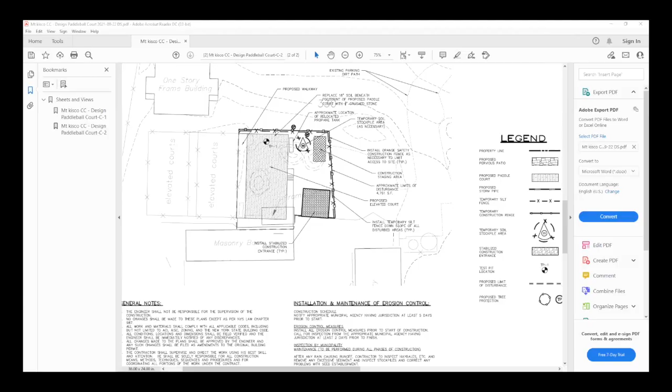So you can see just quickly from Mike's plan here, to the left you can see that there are 2 elevated paddle tennis courts as identified. And we're installing a 3rd one to the right of those. That space currently where that court is shown is blacktop, paved. It's part of the area that the maintenance facilities use to park equipment and store material, etc. So we'll be removing that in favor of the court.

And to the right of that, there's a shed that they use now that will be removed. And there's a landscape buffer on the right side of this court that will help visually separate the courts from the area where the maintenance facilities operate.

John, I'm here now if you want me to share. It's up to you. Okay, Mike's got his plan up here, so that's fine, Karl, thanks. Okay.

So we can see this plan here. There are other drawings of this, and obviously this does not involve any kind of building structures or additional buildings.

The court is added, it does not require, it's not about increasing membership to the club. Frankly, although I'm a member of the club a long time and serve as their architect, I don't play paddle tennis myself, but I understand from the membership that the desire to add this is in great demand.

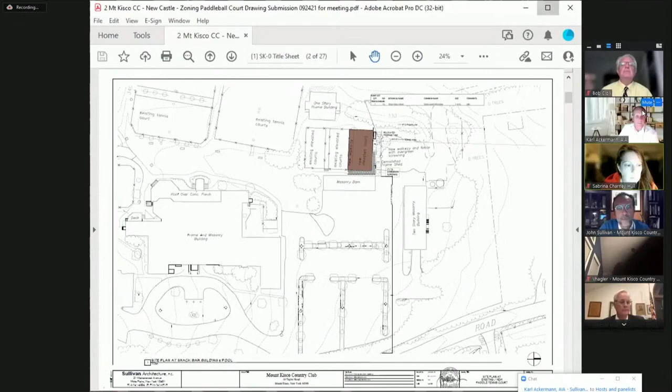You can see here that by this distance diagram, this red rectangle is the added court, and the 2 are existing. There is a large stand of trees that runs behind here. So from across the course, you should not be able to see these courts, maybe just a very faint glow of light. I'm going to go to the next screen.

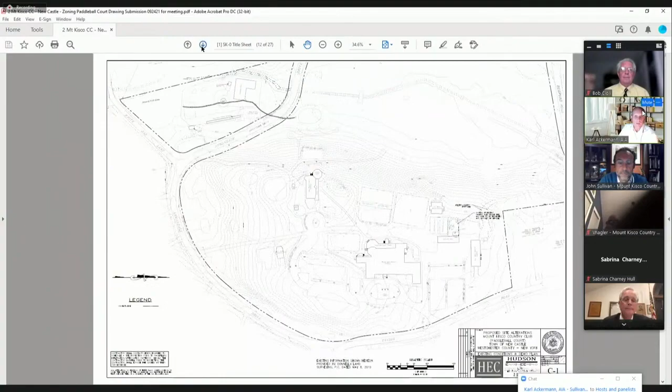And I can go back to a site plan for the board. That's basically a summary of the visuals. If you'd like, I can put up a bird's eye view if that would help. Sure.

How often are the courts played on currently at night? I believe it's become a pretty active sport, as I said earlier. And again, it's predominantly played at night and in the winter, when the rest of the club is, for the most part, shut down.

Could you explain, is the lighting on the court directed down? Yes, the fixtures do face down. We have submitted lighting calculations and fixture cuts, but they are directed straight down.

And they're not that tall, right, Karl? How high are they above? They're about 15 feet from grade. Right.

And there's two courts that are currently there with very similar lighting. It's all down lighting with shrouds on them.

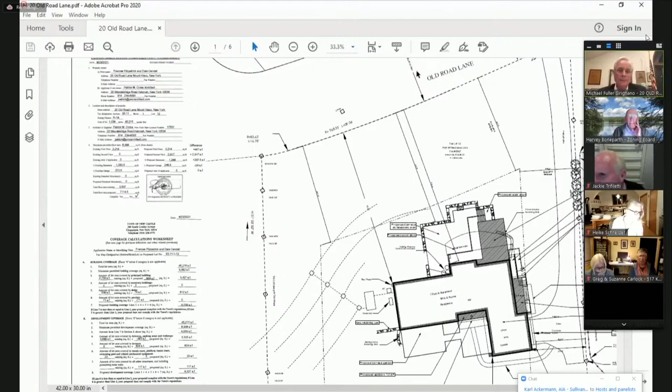So Jackie, I think you have a bunch of photographs. I'll go through them very quickly just so the board can see how well screened this house is from neighbors. If you could put those up quickly, we'll run right through them. These photos will show that neither our minor side yard setback variance nor our FAR variance will produce any undesirable change in the character of the neighborhood or cause any detriment to nearby properties.

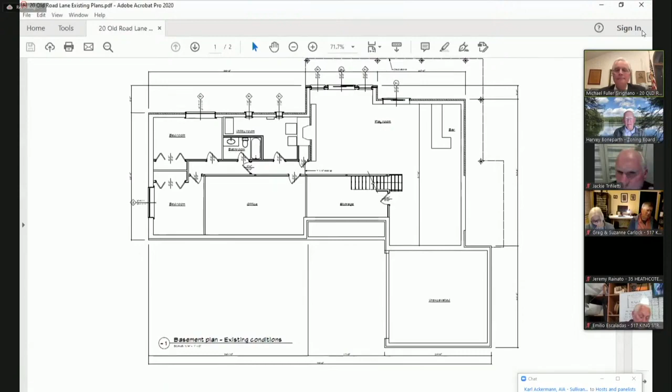Go next. Scroll down to the next plan. All right, this is the existing first floor plan.

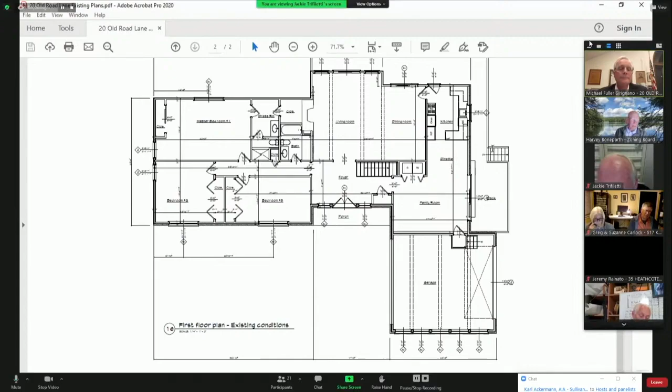First floor has a small kitchen in the upper right corner. There's a dining and entry space below that, between the kitchen and the garage. To the left of that, next to the stair, is the main entrance to the house, which Michael pointed out is on the 128 side rather than the Old Road Lane side.

At the left end of the house there are actually 3 bedrooms, some closets, some dressing areas. The plan of the existing actually works out to 5 bedrooms. What we found from the health department is that the approved septic system is for 4 bedrooms, so we are reverting to a 4-bedroom house for the new, not expanding it to 5 bedrooms, which is what the current arrangement allows in the existing house.

Can you go to the new plans. Are the new bedrooms intended for grandchildren or others?

Well, Dale and Francis have 3 adult children. Well, one's in college - I suppose that still makes her an adult. They hope that certainly there'll be space for grandchildren to visit, but they're going to hang on to the house next door at number 14 with the hopes that one of their children may want to live near their parents, as strange as that may sound.

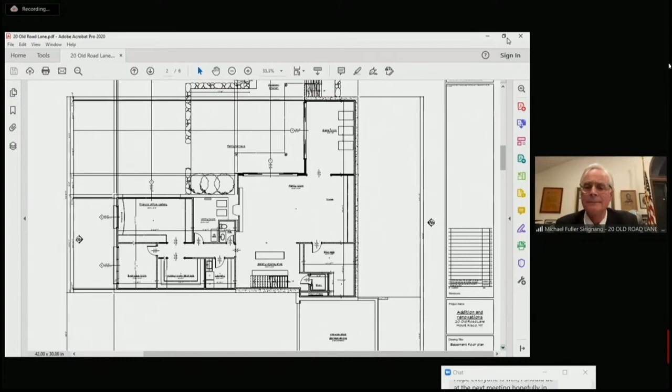Can you show us the plan that has the second floor addition? Yes, I'd just like to point out on the site plan here, Michael touched on it quickly - there are 3 areas of addition to the house. The area at the top of the page is an addition with a footprint of 422 square feet that will house a kitchen on the first floor and a bedroom on the second floor.

The small rectangular hatched area to the right side is a second floor addition that overhangs the new entrance at the first floor, so it provides cover to the front door. And then the small hatched area at the bottom, where the existing entrance is, that is currently a roofed area - it will be incorporated into the first floor, so only about 70 square feet is being removed, changed from roofed exterior space to interior space.

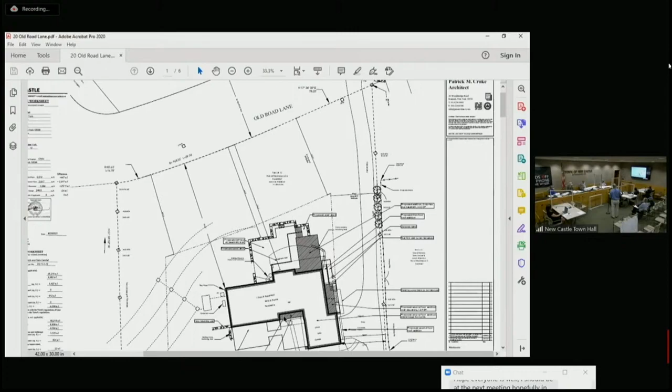You can go to the third sheet, A3, with the first floor plan. So this is the first floor plan. At the left side of the plan is where the existing driveway comes in. You can see the existing garage at the bottom of the plan. The new entrance comes in at the center of the right side of the house. The entrance comes in, there's a mudroom between the foyer and the garage.

To the upper section of the page there's the kitchen addition. There's a dining room between the foyer and the addition, and then a large living room with the existing fireplace at the center of the plan. The space to the left side of the plan is a new master bedroom suite. As Michael had mentioned, this is intended as a retirement home, so we're providing for full living facilities at the main first level.

We've relocated the stair to the second floor to the space where the old entrance was, so there's a stair there that goes from the basement to the first floor to the second floor. Can we go to the second floor addition?

The second floor is completely new. It's a 1-story ranch house now; with this addition it becomes a 2-story home. The spaces along the right side of the plan are the 3 new bedrooms. There's a dance studio over the existing garage space.

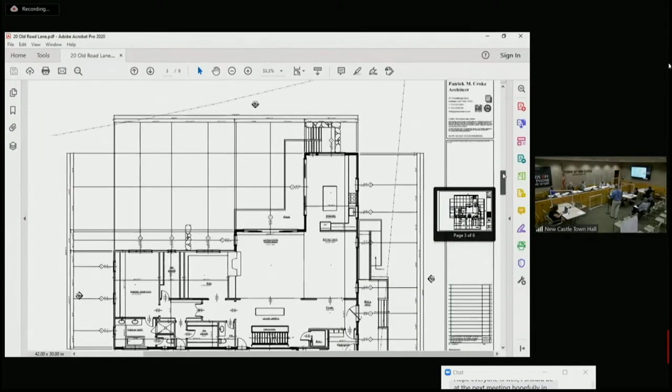The basement functions very much as it does now. It's family space, recreation space, a TV room, a game room, storage, mechanical space, and then the space at the left end of the basement level is a home office for Mr. Fitzpatrick. Both Mr. Fitzpatrick and Ms. Sandali work from home quite often. They need an adequate home office to perform their work, along with storage for files and other things.

There's also a small exercise room below that. So if we can go to the elevations.

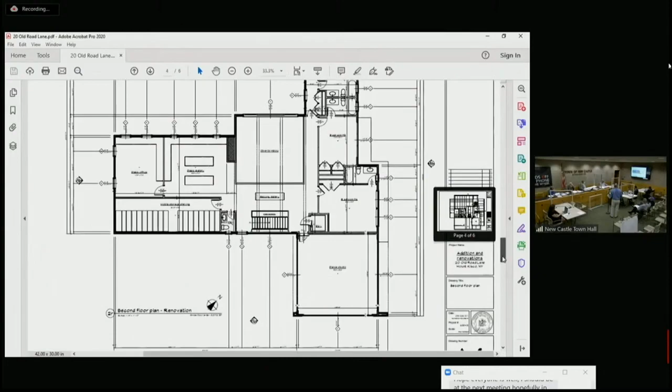Just zoom out a little bit, please. So the elevation on the top is the side of the house that faces Route 128. The garage is the left portion. The dance studio is the piece over the garage with the windows. At the left end of the house is master baths and closets on the lower level, and storage space for Mrs. Sandali's office and collection on the second floor.

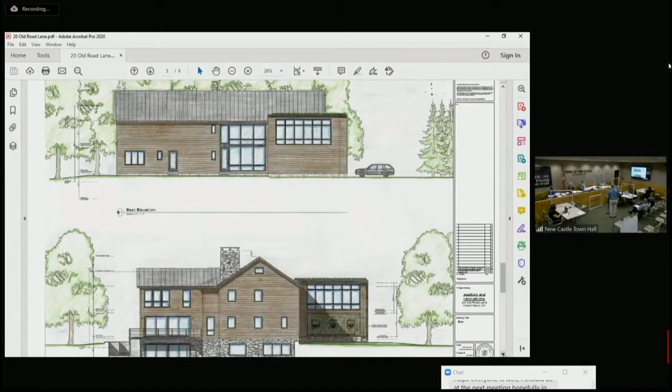The elevation at the bottom of the page is the south end of, not too far. Sorry. It flips quickly. At the bottom of the page is the, actually showing, it's the bottom right, the west. I don't know what's going on. We've got two copies of the same picture on right now.

Okay, that's fine. The elevation at the bottom of the page is the south side. Mrs. Sandali's office on the second floor, master's bedroom suite on the first floor, Mr. Fitzpatrick's office and exercise room at the basement level. To the left end of that elevation is the kitchen addition. The kitchen addition has a deck around it. It looks down onto the existing terrace that you saw in some of the photographs to provide an indoor-outdoor family summer entertaining space. Next elevations.

I don't know why it's split like that. Yeah, it's not removing that one. So this, the elevation that you see, let me just go down a little bit, it's not removing that first one. Not the other way. The other way a little bit. Let me go out of there and go back in. Let me see if that helps.

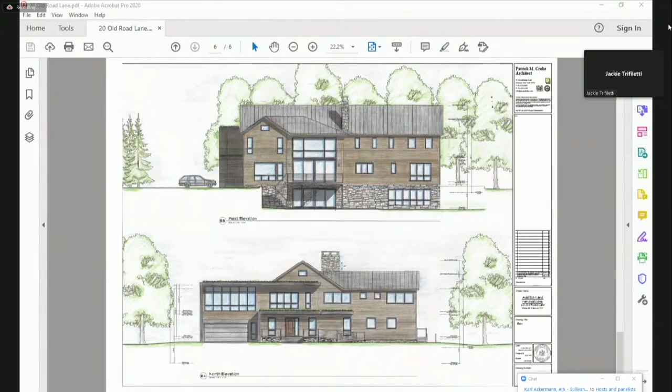Thank you. Any questions for the applicant or his architect?

I just have one question. You're netting out to 4 bedrooms? I thought you said you had 2 bedrooms in the basement, 3 bedrooms in the first floor? The original house had 2 bedrooms in the basement, 3 bedrooms on the first floor. The new renovated house has a master suite on the first floor and 3 bedrooms on the new second floor. There are no bedrooms in the basement, no bedrooms anywhere else.

How many bedrooms is your septic approved for? 4 bedrooms. And how many bedrooms will there be in the new house? 4. We're not increasing the bedroom count from what is approved by the health department.

The old bedrooms, how will they be treated? The spaces, how will they be converted to non-bedrooms? Well, the spaces in the basement will be, one of those spaces is used for Mr. Fitzpatrick's office. The other one is a small exercise room and some storage space adjacent to it. There are no full bathrooms down there. There is no accommodation to make any of those spaces a bedroom. Will any of those rooms have closets? No, I don't believe we're showing closets in it, although that is not a criteria from the health department anymore for determination of a bedroom.

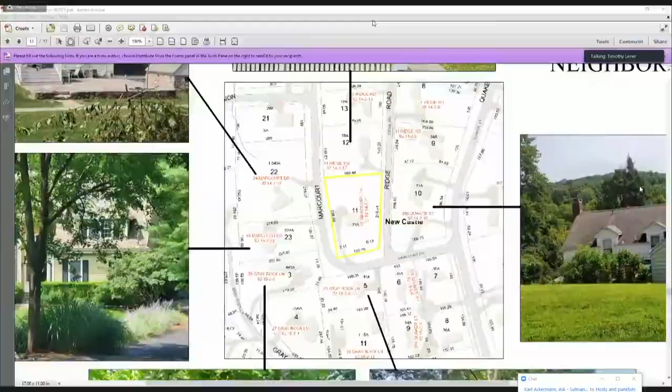So coming down Marcourt, here's the house, the area in question is back here. There's a lot of excellent foliage that separates properties here, especially along this side of Marcourt, and then over between my client's property and Marcourt on this side.

To take you down the road a little bit, this is coming off Quaker, coming up to Ridge. And there's my client's property on the right-hand side. This is the driveway up to the back of the house.

When you turn around the corner here on Marcourt, you can see the excellent foliage. There's also a pretty substantial change in topography here, the elevations of the houses. My client's property goes up, then it comes down where this foliage is. The road levels off and continues to go down to the neighbors on the other side of Marcourt. So when you look up and see the area where we're planning on building, it's right there. It's kind of impossible to see, at least in the summertime.

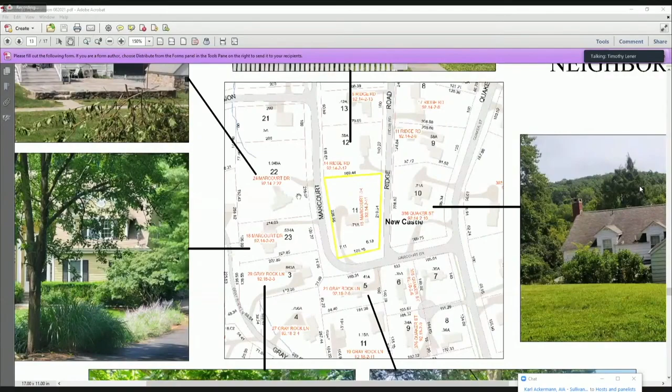So that's that part of it, and I will now run you through the plans. Again, we're back here showing where the area is. I just drove you down the road and we looked at it from the sky. And now I will get to the site plan and the floor plans.

So here's the site plan. The driveway comes up, it rises up. Like I said, you can see the topography sloping off here, and that's where all that nice foliage is. All the trees are marked on the survey. And the area that we want to build in is in the back of the house.

Like I mentioned before, we have 3 front yards, so we have 50-foot setbacks on these 3 sides. Normally, without one of these sides being here, this might be a side yard and the setback would be 20 feet, and I wouldn't be here tonight. But because we're surrounded by 3 roads, this 50-foot setback comes across actually through about 25% of the original house.

By the way, the house was built in 1927, predating the zoning code by 1 year, which I found out this morning from our building inspector, Mr. Tom over there. Thanks, Tom, you helped me. So the house predated the code, and maybe when they saw this house being built, they said, 'Oh my God, we need a zoning code.' I don't know who knows what, but we're here now.

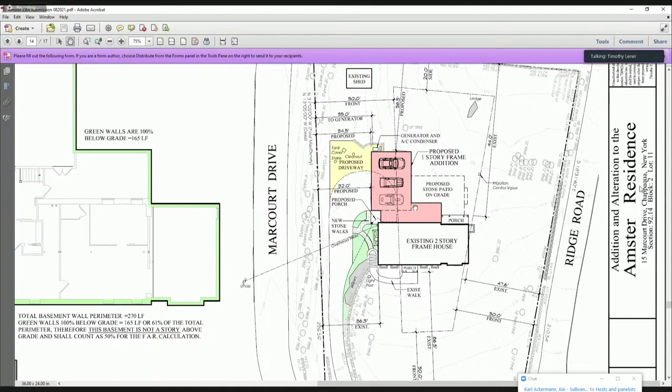So the existing house sits off about 36 feet from that Marcourt property line, and because I don't want to disturb views from the existing living space, which is right here out to this nice backyard, I brought the garage back pretty much as far as I could without interrupting any vistas. The depth of the garage is 24 feet, which is a pretty normal sized garage for some large cars that are there today, plus a little bit of storage. That happens to bring us a couple feet, 3 feet closer to the property line than the current house. So this is the corner of the current house.

This is the little side porch we'd like to build, which is basically open except for a roof structure above it, and this is the wall of the garage doors. So, I'll get to the elevations in a second, but this is basically a low eave here of 1-story height, and it's also a 1-story eave on the opposite side. But since this is the side that needs the variance, that's the one we're going to talk about.

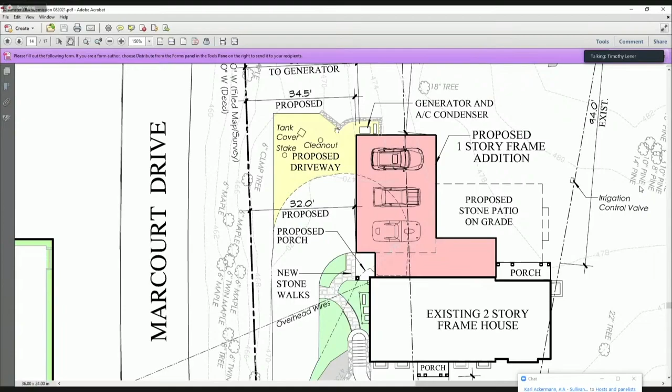So like I said, it's low. We put some dormers in the roof to keep the massing down. We actually got ARB approval earlier this month, so they were very happy with the architecture we created.

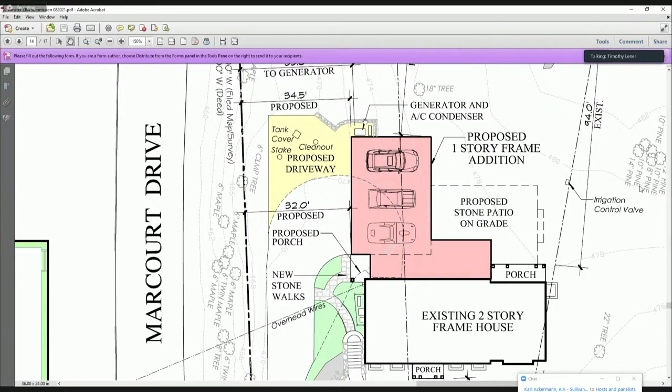We also need the variance for the generator. The entire electric system is set in this corner of the house right now, so a straight shot back would get us to a generator that's surrounded by the wall of the garage. And I need a couple of retaining walls back here to kind of set them below the grade for the most part, so the neighbor who's back here would be less impacted by it. It's kind of hidden, and it should also keep the noise down a little bit.

So the floor plan is right here. We're going to come in through this new porch into a new entryway, because the only way to get into this house right now is up a whole bunch of stone steps on the outside, either through the front or around the back to a small porch. You could go through the garage, but the garage is kind of rough, the basement's kind of rough, and the stair up is not compliant with any building code. So we want to build them a new way to get into the house here with a new stairway and lots of light, bringing them up into the space that's already finished in the part of the house.

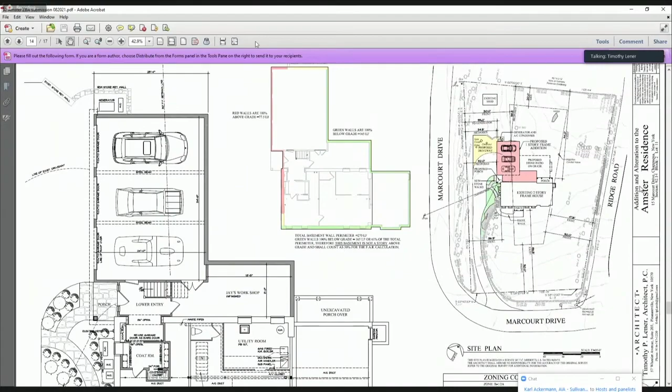So 3-car garage, there's a generator, and I'll now walk you down through the other floor plans. Above the garage, we'd like to have an office space and another space for family entertaining. These days, with a lot of people working permanently from home, that's the case here, so we wanted to get a home office.

Lots of light fill, but still kind of separated from the daily goings-on of the family up at the main part of the house. This is that existing living area I was talking about earlier with the views out to the backyard. We are going to put a room back there, but it's basically a glass room with a lot of skylights, kind of like a three-season room. But this view is really important, and that's what really set this wall location, in addition to one other thing on the outside that I'll get to in a minute.

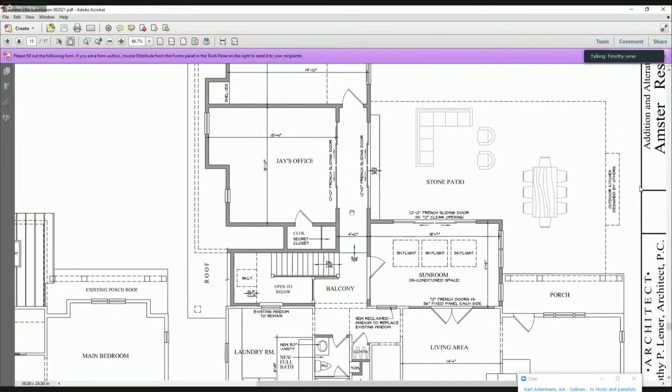Second floor. Nothing really on the second floor that needs a variance for sure. We're going to do a little closet space dormer out of one of the bedrooms. But this is the roofline plan that you're going to see from the top.

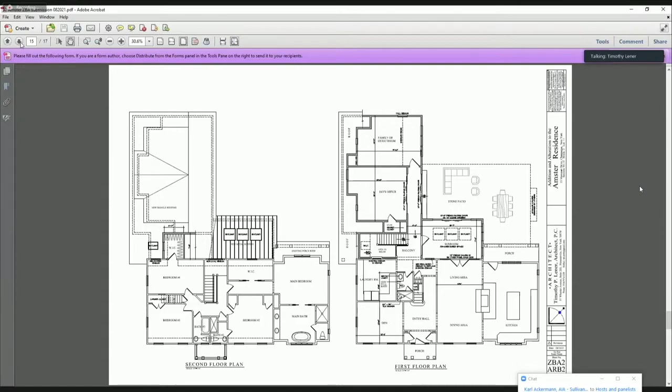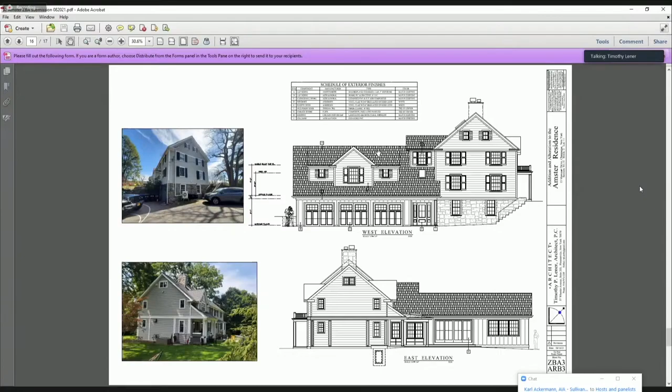Elevation-wise, this is the view from Marcourt, or from the driveway view. These are the existing stone steps going up to the front porch. This is our new side porch, the 3 doors of the garage, the low eave line I mentioned earlier, and just using a dormer effect to minimize the massing of the addition and keep it as minimal as possible.

From the opposite side, again, it's a low eave, a low ridge to allow as much light in the western evening sun to come through here to the backyard as much as possible.

This is the existing house. You can see what is a so-called garage, which cannot possibly be used to park a car in today. So the need for the garage space is really critical here. They're parking out in the driveway, totally uncovered, and there's a lack of an entrance into the house to begin with.

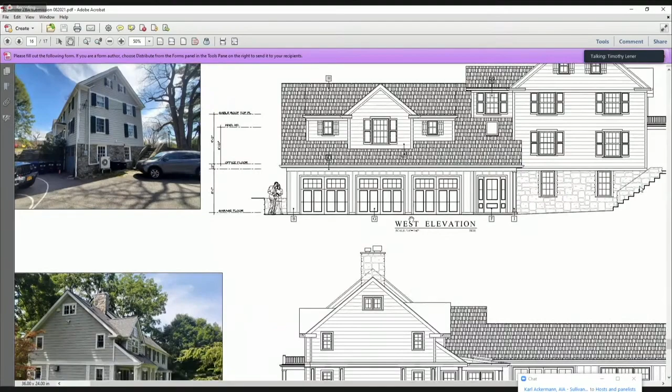To do this addition, we are going to be removing an antiquated septic system, if you can call it that. We're already on the way to getting a Board of Health approval to do a new 5-bedroom septic in the front yard.

The front elevation has minimal impact visually. This is the view of the side porch. It's just a low 1-story roofline and the dormer beyond it. And again, the rear elevation, we tried to keep the eave and ridge lines as low as possible to minimize massing.

Another reason why I wanted to keep this wall back as far to the right here as possible is at the top of the stair there's a beautiful landing, and then it goes up a couple more stairs. We wanted to keep a window presence there, so we put this monumental oval window, and we're just clearing the bottom of that window with this roofline to fit all of the features the Amsters were looking for in the house. So that's basically it.

Happy to answer any questions and relook at something if need be.

How will the generator be powered? Propane. Where are the tanks? No, underground. Oh, we have natural gas. I wasn't sure if we were using that. You have the natural gas at your house? Yeah, natural gas. Okay, I changed my opinion. I wouldn't be so sure, Tim. Is Con Ed's moratorium still in place for the natural gas? You may not be able to get it. Do you have natural gas in the house now? We have natural gas, and we put in a new service about 6 years ago when we moved in. And is it adequate for an additional line to the generator? Yeah, because I had planned on doing this back then, so I asked them to make sure everything was future-proof. So you don't need any further approvals from Con Ed? I don't think so, no. I would be very careful, because the last I heard, they're changing their parameters to an individual service line just for generators, even though you have natural gas in the house. This may not be the case in your neighborhood, but there are neighborhoods where they're doing that. So I would be careful as to what it is, and then make sure you get the right specs to the town for it, whether it's going to be natural or propane. Okay, thank you.

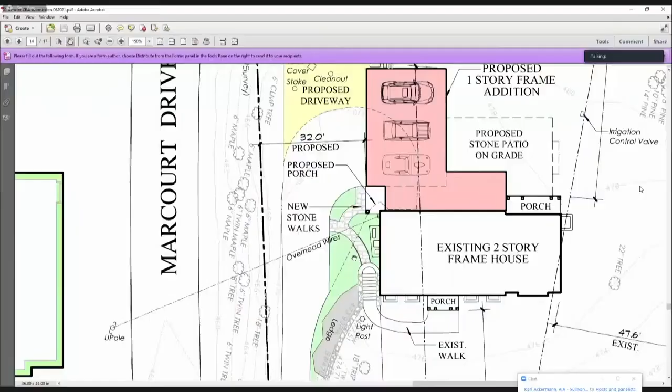So over here you've got existing air conditioning units, there's a stairway, there's walkways here. This, to me, would not be ideal, because this would be the only other possible place to put it. It doesn't seem ideal to have it right where you're driving up, aesthetically, to the house, whereas this is a nice place to bury it, and it requires less of a variance to do it there. Where's your electrical panel? Right here, in this corner. So it's a straight shot back to that generator. So you'll have to run it through the ceiling of the garage?

Yeah, it's a heavier wire, that's for sure, and it's not the cheapest thing in the world, but to get the generator far back, to have less impact on this family and the neighbors, I think it's worthwhile to do as we've shown. I think you're right.

There's a significant amount of trees and shrubbery between my property and the neighbor's property. Which neighbors are we talking about? On Marcourt or on Ridge? Well, they're directly behind me, so where that line is on the top. Ron Jay.

How high is the retaining wall around the generator? 8 feet. Say again? So the generator location will be roughly where you see my hand right now, right about there. So you can see, I don't know which neighbor is even closer, this one on Ridge with all that buffer, or this one on Marcourt with all that buffer.

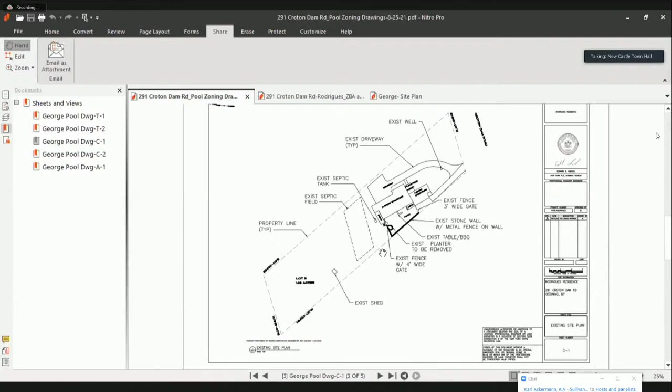So we currently have a site here where we want to propose a small 12 by 20 pool, kidney shape, towards the west side of the property. The current lot is already small in size, 1.01 acres in an R2A zone. We have Route 134 towards the south here, also at Croton Dam Road. The main two-story house sits here, and we are proposing the small kidney pool to the west side of the house.

The current area that we're proposing is already a pavered area, established with gates on each side and enclosed by a stone wall along the property line on the west side. Towards the north of the property is just yard with the septic field, as we noted. So the applicant wants to propose a small pool here that comes out from his sliding door in this area where he can access it.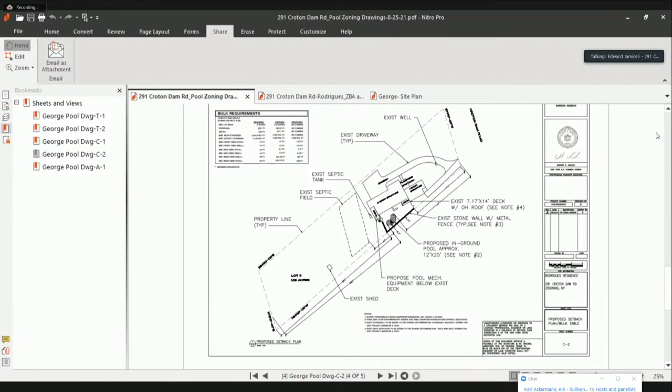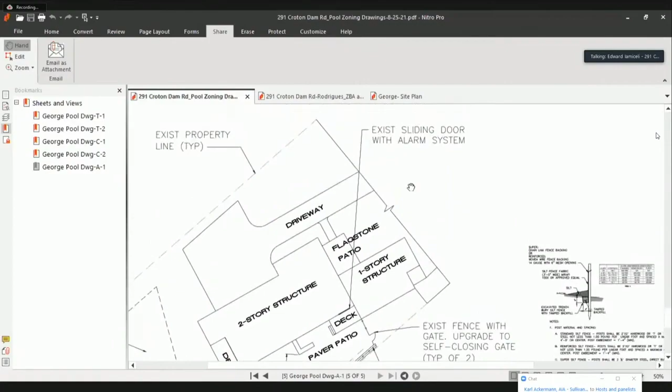As I mentioned, it's already a developed area. I'll zoom in slightly here. We already have a gate on each end that's enclosed, with a self-closing gate. We also have the sliding door coming out of the house that is equipped with an alarm system, so when you open it, the alarm system is accounted for since the pool area is enclosed.

What we found out is that when there was an addition put on the house back around 2006, the stone wall and this deck you see here were part of that build, but it didn't make it onto the as-built drawings. So we wanted to include that as part of the variance and approval process for this little deck, and the stone wall if required. We wanted to bring it into this application. As you can see, we're already close to the property lines.

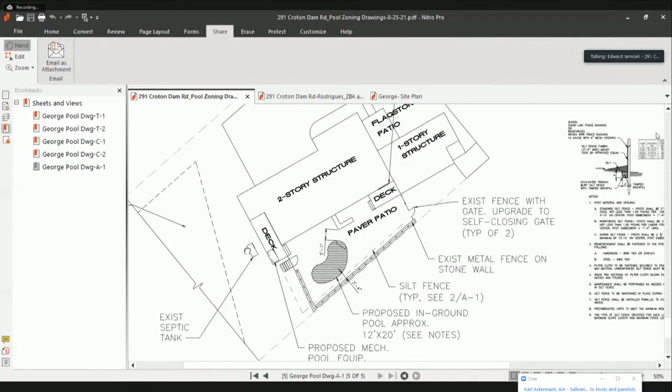So the variance request here is for the pool to the west end of the property line, which includes everything else. This lot, under the R2A requirement, is already a non-conforming existing lot, so we already have tight constraints as to where we could place this small pool to begin with.

Who are your neighbors on the west side? So this is 289 Croton Dam Road. They recently just bought the house here. We know them very well. There's a driveway that separates the two homes, running north-south, and they have a two-story home to the west of that.

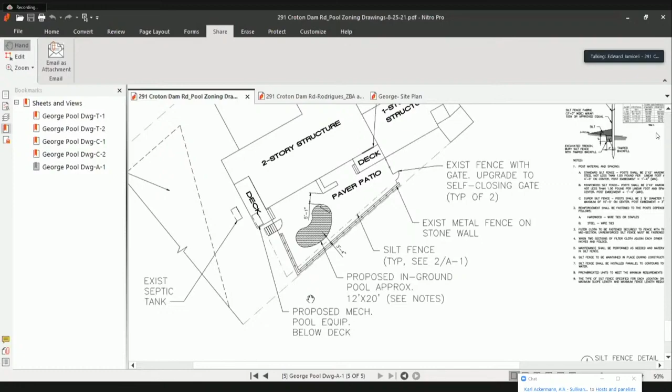George is very friendly with them, and there's no issue there. Have they seen your drawing and have they approved the location of the pool?

So far we haven't heard any opposition or issues. I know George, I don't know if you want to speak to that. I know the neighbor mentioned he had no issue with it as well. There is some shrubbery and separation between the two properties, with about a 3-foot buffer before their driveway. Actually, he sent in a letter saying there was no issue — he was in favor of it.

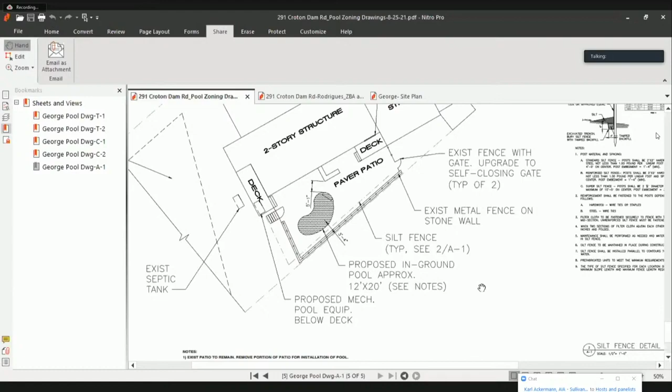Did you consider any other location on the lot for the swimming pool? I know it's most convenient to step out the door and have the pool right there, but did you consider any other location? We did, yeah — convenience is one factor. You have the septic field in this area, and another dry well catch basin down here, so you'd have to be closer to the north end of the lot. But that area drops in topography quite a bit, it's a downslope, and right back here is a bit of a water course, so we didn't want to get too close there. We wanted to keep it as close to the house as possible and within a developed area.

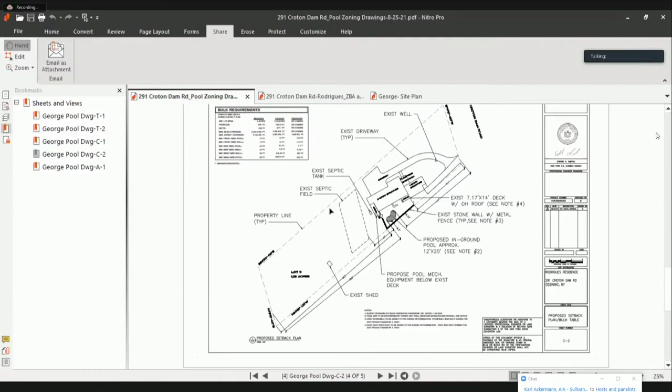We're also putting all the pool mechanical equipment in a room below this existing deck, tucked in underneath in this area here.

You don't have any aerial views of the immediate neighborhood, do you? I do have just Google Earth. Let me see if I can share it.

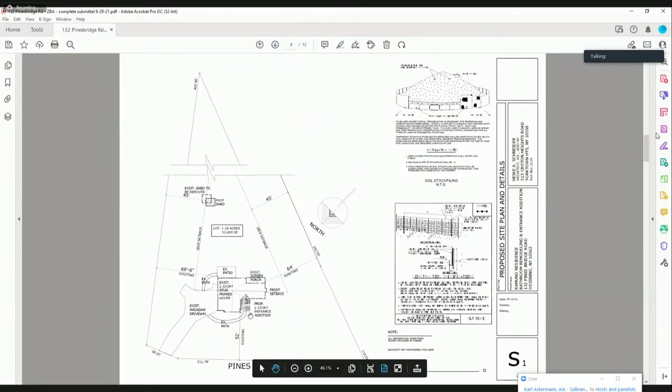So these are the neighbors, and they're really far away. Let me just enlarge it a little. This is what we're proposing. You see the outline of the existing house, and here the 52 feet off the property line. This is our 1-story entrance addition.

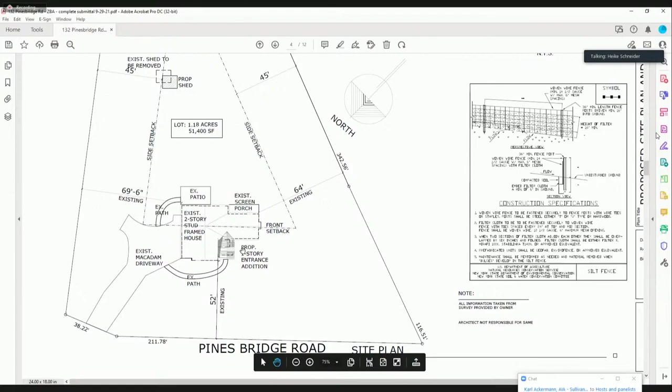And here's the front elevation. At the same time, we're also trying to give the house a little nicer face from the front, and also a very nice entrance door.

And here you see, this is what I wanted to show you, this is what we're doing basically. This is the side elevation, and you can tell that the main house is actually protruding more than what we are proposing here with the small addition.

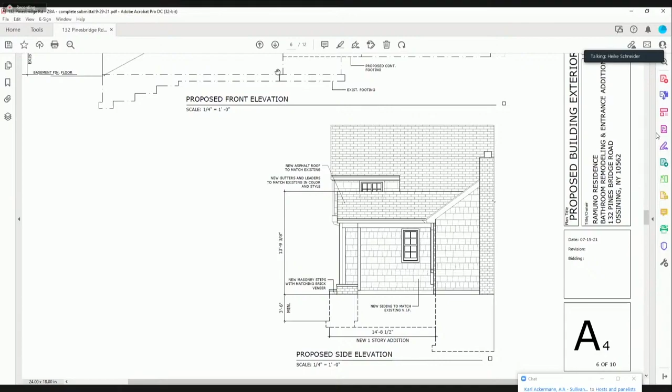Apart from the 25-foot variance from the front setback, we are complying with all the other requirements, the FAR and the building coverage and development coverage as well. Here are the calculations. Yeah, so that's really it. I don't know if you have any questions.

Is there anyone who wishes to be heard on this application? I don't have anyone online. Thank you. Questions? Pretty straightforward.

I move we close the public hearing. Second? I seconded. Giardino, aye. Harvey Bonaparte, aye. Howard Dubs, aye. Michael Nolan, aye. I'll make a motion.

I move that the Ramuno application for a front yard variance of 25 feet to create a new entranceway and powder room in a legally non-conforming site be approved for the following reasons: this will certainly improve the appearance of the home, make it more livable. There will be no change in the character of the neighborhood. The benefit cannot be sought through other means. The requested variance is not substantial in this case. There will be no adverse impact on the physical environment. And the alleged difficulty is technically self-created.

Please go ahead. Thank you, I'm going to share my screen. We have here a project where we need to get 3 variances: 2 front yard variances and one side yard variance. This is a property on 48 Ludlow Drive, a 0.9 acre lot in the 1 acre zone. I will show you an aerial of the property here.

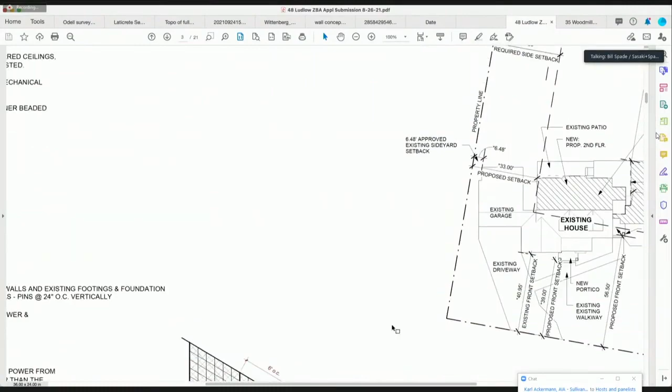The current proposal in total, as you can see from the site plan, is to add a 1-story addition to the right end of the house for a family room and den. Everything about that construction, which is hatched here, conforms to zoning. We're also proposing to pop up the rear roof of the second floor to increase the head heights in those small bedrooms.

So our addition on the back, in popping up that roof, the rear left corner of the house is 2 feet into the side yard setback at that second floor. The existing garage is fully into the side yard setback, only 6.48 feet off the side property line—that's how the house was originally constructed. You also see the front of the house was built well near the front property line, about 41 feet to the present corner.

We are also proposing to build an entry portico over the front door, which right now has no cover—you enter right where I'm pointing, and there's no roof over that area. So we're proposing a 5-foot deep portico over that door. Then there's a side door over here that was probably the original entry, with a small porch but again no roof cover. We're proposing a roof over that as well, and a little extension of the porch, which requires a variance for the posts to support that roof structure.

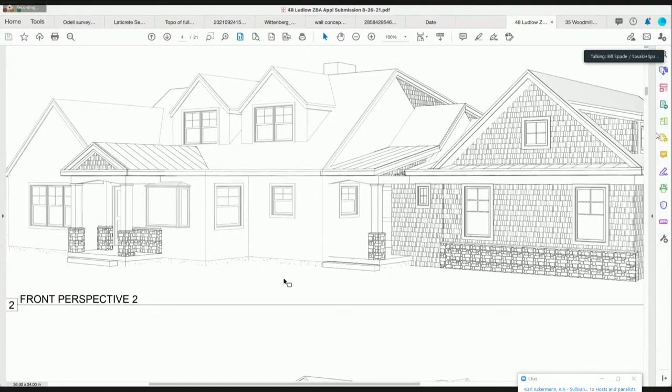Here's a quick couple of elevations and renderings of the addition. This is the one-story addition to the right end of the house with the side portico, and here is the new proposed front portico. The posts, piers, and bit of patio we're constructing are where we need variances for those portions, but the one-story addition on the right does not need any variance.

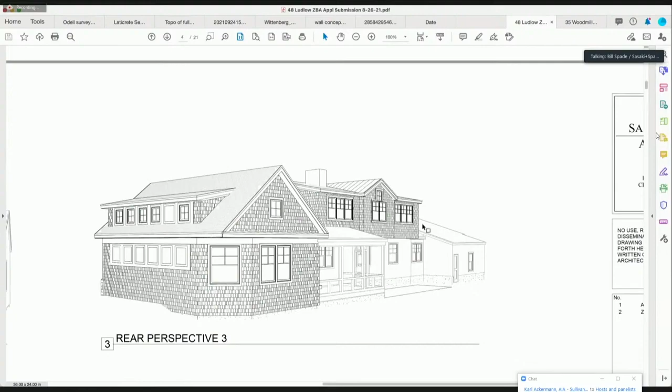Here's a rendering of the rear, showing the pop-up of the second floor—I think this is a better view of it. It's this 2 feet of the corner of the second floor that's extending into the side yard setback, so we need a variance to complete that element on the rear. The ridge remains the same; we're literally just popping up the roof to increase the space in those bedrooms.

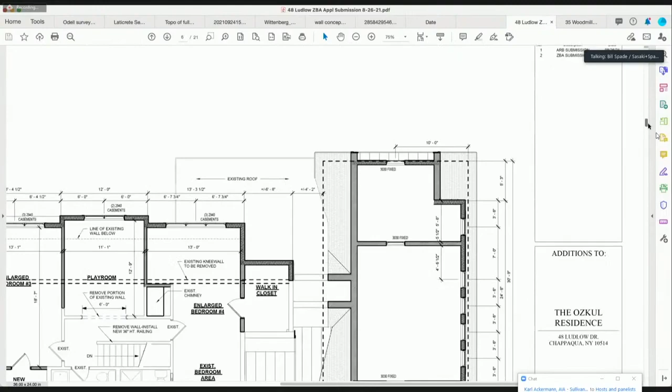I'll show you a quick floor plan. Here's the first floor, showing the addition on the right end, and then the two porticos—the front portico and the side entrance portico. Here is the second floor, the pop-up of the back of the house, and again this rear left corner is what's extending into the side setback.

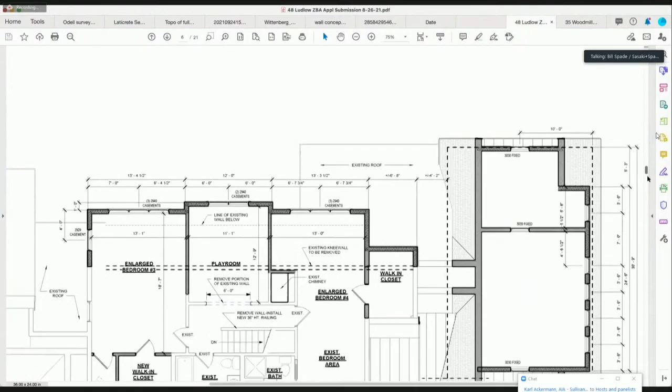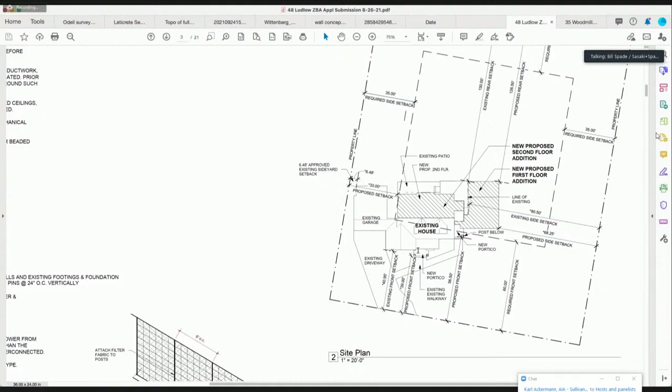So finally, the variances we need—better to show you from the site plan. We need a front setback variance for the front porch of 21 feet. I'd actually like to request 22 feet total so we're still good when we get to the as-built survey. Our side entrance needs a 3.5-foot variance—maybe make that 4 feet, again for safety. And our side setback for the second floor needs a minimum 2-foot variance, maybe request 3 feet, just in case conditions differ from what we understand. So those three variances are the ones we're requesting.

We believe they're not detrimental to the neighborhood. We tried to do the minimum variances required, but due to the condition of the house being tucked well into the front corner and pre-existing into the setbacks, there was really no choice but to need the variances in order to do these modest elements. So that's my presentation.

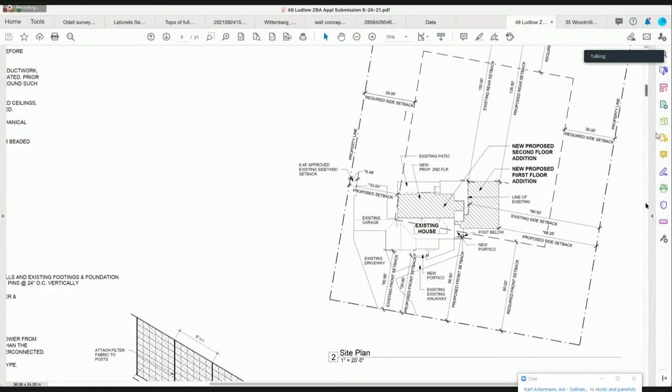I think you're stunned, I guess. Well, the obvious question is, do you give a design discount when doing double porticos?

Yes, we give a discount on everything we do. Once we add one, we have to add the other one, sure. But I think, hopefully everybody would agree, it's an elegant addition to the house we're trying to achieve.

Good. Carrie, is there anyone who wishes to be heard on this application? Don't see any hands up. Okay, make a motion we close the public hearing.

Second. Chairman Kenneth Cooper, in favor? Dave Giardina, aye. Harvey Bonaparte, aye. Howard Dubs, aye. Michael Nolan, aye. Who'd like to make a motion?

I'll take it. I move that we approve the application of Megan and Evron Ozkul for a second floor variance of 3 feet, so they can go up in that corner, a side entrance portico variance of 4 feet, and a front portico variance of 22 feet.

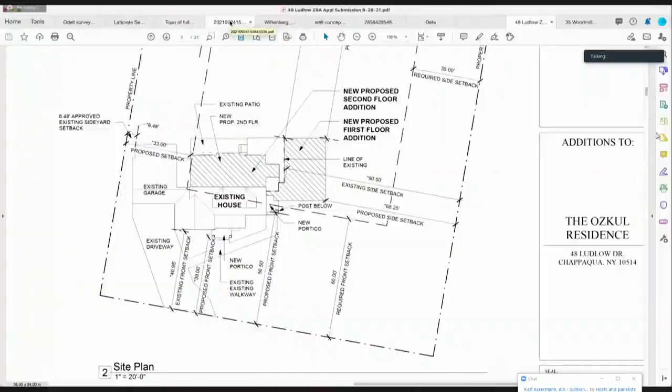You see in front of you an aerial of the property. This is 35 Woodmill Road, the end property on Woodmill Road. We don't see that, Bill. Oh, I'm sorry, I did not do the screen share. Yeah, it's right in front of me. You can see it now? Yes, we can, thank you.

Here again, the aerial: the property in the middle is the subject property, at the end of Woodmill Road. There was a house here originally built in 1969, thereabouts, as a one-story ranch. The current owners, Mr. Cyphers, did an enlargement of the property; 2007 was when the construction happened. They were planning it for a couple years before that. The house was enlarged at that time.

I'll point out there are really two driveways for this property: one going up the left side to the garages, and one going up the right side to a turning circle. Both of these driveways were built with the original house, so this condition was pre-existing. We're going to talk about a development coverage variance, and it's principally because of those driveways that the development coverage was beyond the limit. It's a 2.4 acre lot in the 1 acre zone, and we are ultimately looking for 4 variances.

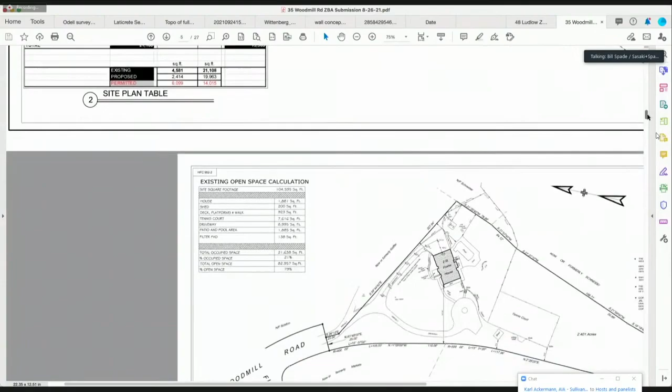Just to say at this point, I don't think these numbers at the time were quite calculated correctly. So I think the reduction might not have been accurate, and likely, where we've ended up is where the project would have ended up in any event. And again, to note, they show this existing pool to remain with this existing patio around it to remain. So I don't think there would have been any net reduction in the coverage, and yet they took a 1,638 square foot reduction for it.

One other item I'll point out that also affected the coverage: the prior driveway actually extended onto the neighbor's property, and you see it here. That encroachment on the neighbor's property was a pre-existing condition from the original house. So Mr. Cypers undertook moving the driveway to get it fully on his property.

So possibly some of the difference, their prior driveway calculation was something around 7,800 square feet. Our new driveway calculation is about 8,900 square feet. So we have a total of a 1,600 square foot increase that we're having to get this variance for.

It would appear that 1,100 square feet of that is what the actual driveway is compared to what they showed the driveway being at that time. But presumably they didn't count the portion of the driveway that was not on the property, as I showed on that other plan. Now the driveway's been relocated to be fully on the property. So possibly some portion of that 1,100 square foot difference might be due to the fact that we're now calculating the full amount of the driveway on the property.

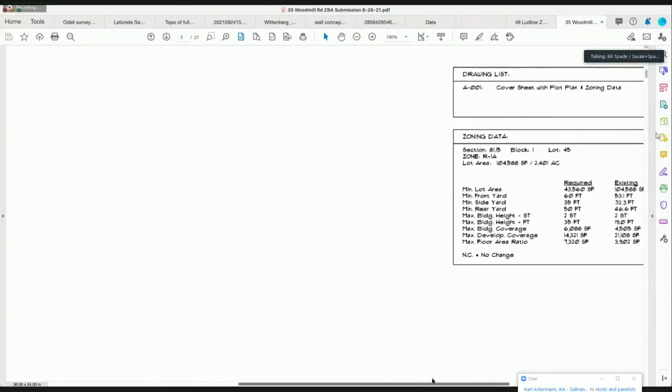But, at the end of the day, we're requesting a 1,600, I think the total is 1,675 square foot increase in that variance, to 21,638 square feet for the development coverage.

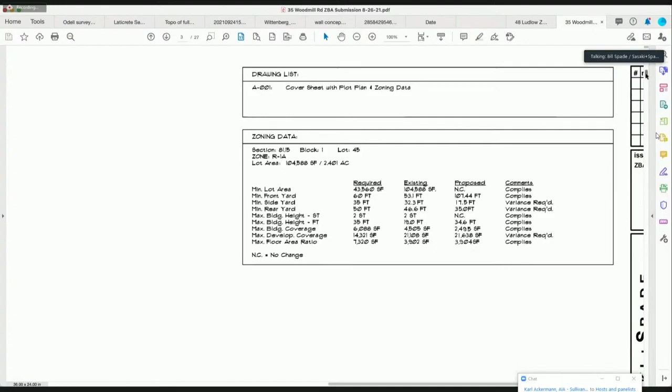Bill, did you look at ways to get down to the acceptable development coverage?

As in the permitted development coverage? Yes.

The only way I would note, there's an existing tennis court. So between the house, which is essentially the same footprint as the original house, to reduce it would have meant removing a substantial element of some pre-existing item. For instance, one half of one of the driveways, or the tennis court. So to do anything to get anywhere near the required coverage limit would have meant removing one of those items. So I didn't.

I guess what I'm asking is, go ahead. Was there any good faith effort made on the part of the applicant to mitigate what has gone on here, which is a little hard to follow, but I'm sorry. Okay, or understand? Maybe I've done a poor job of explaining. No, I don't think it's that. Okay. I just think there were miscalculations and other errors that were made, perhaps decisions made by the owner, I'm not sure.

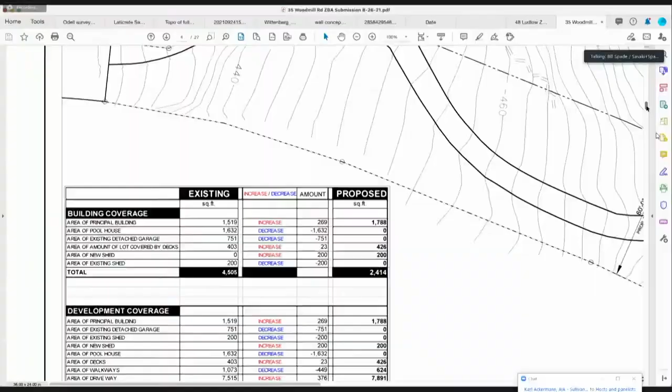Yeah, my only thought in response to what you're asking is the zoning board approved the configuration that's currently showing, with the two driveways, with the pool, with the existing tennis court, with the house. And so the 19,963 square foot development coverage was approved. And so what's turned out is that with pulling the driveway fully onto the property, and with what might have been some miscalculations of the square footages, the actual is 1,675 square feet more than what was approved back in 2005.

So Bill, it seems to me the original approval was granted due to inaccurate information. And I don't know if more accurate information had been given at that time, we don't know what the outcome would have been. Would have been approval or disapproval?

And the obvious question to me is, why do we need two driveways? Let's get rid of a driveway and make everybody whole again. I don't see the practical need for that second driveway with the loop in it, unless you can explain to me and convince me that that's an absolute necessity.

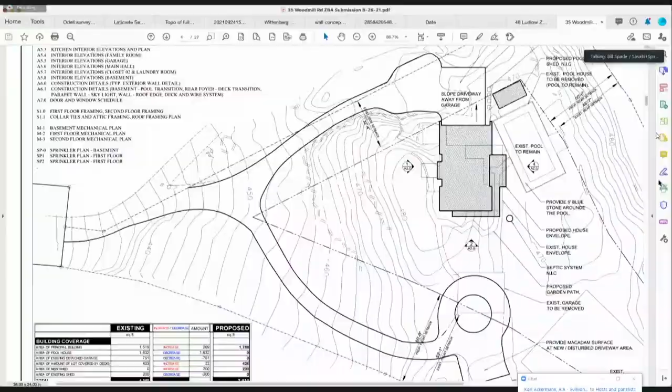Well, maybe Mr. Cypers is on the call here, and he can talk about the functionality of that driveway. I think that's the main entrance driveway, that's where visitors and guests park and enter the house. The side driveway goes to the garages, which is one story below the front entrance. So I'll just point out, here's that circle drive for accessing the front door, and this is essentially at grade to the front entrance, which is here. And the garage driveway is again one story below grade, or below this first floor level.

So why couldn't a spur be taken off of that upper driveway closer to where the front door is, and a little parking area put there, and a walkway to the front door, and get rid of all that coverage where the circle is, and that hammerhead, and that loop to the existing driveway? I'm hard pressed to see how that could be proved to be necessary.

All I'll say was it was pre-existing, that was built with the original house. Well, that doesn't make it right, though. Well, the zoning board approved this from before. They approved it with inaccurate information.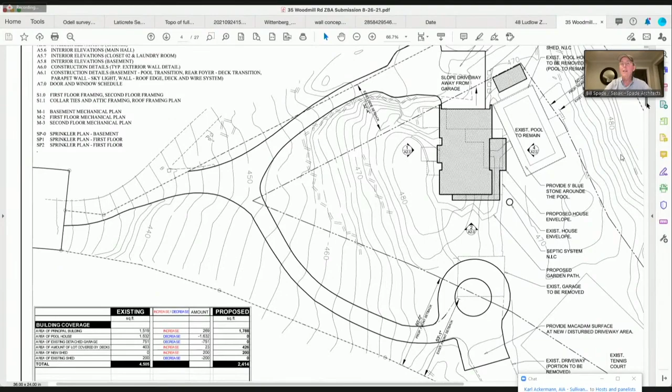Excuse me, members of the board, can you look down to the bottom section of the screen? They were proposing to remove a section of the driveway and the existing shed. They're still there now. Well, that's what I'm driving at. Tom, just to be accurate, the portion of the driveway got removed, the shed still remains. The shed is still there, okay. Yeah, here, I'll show you, you can see it on the plan. That piece of driveway did get removed, the shed still remains.

Why did they keep... I guess I understand the circular nature of that part of the driveway. Yeah. Why did they keep that spur or the section outside of the circle?

This piece here? Yes, again as you see from the original plan, this driveway extended over to the shed. So there was a portion removed. I think this is just a parking area, where people parked to be out of the way of the loop of the driveway.

Isn't there an architectural solution to getting from the garage side of the house to the front door? I understand it's one level down, but isn't there an architectural solution that gets you there? There are steps, it's a steep grade there. You can see this zone, the grade lines, it's a steep grade.

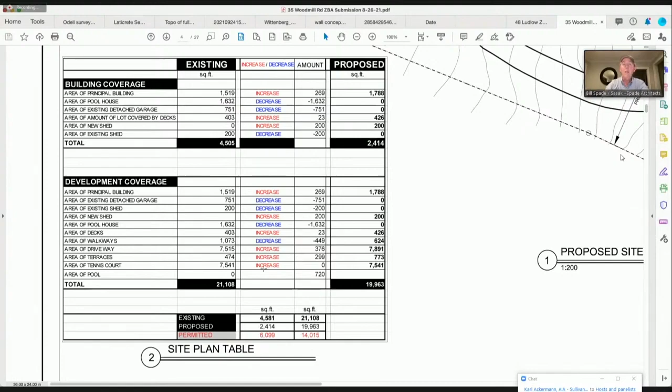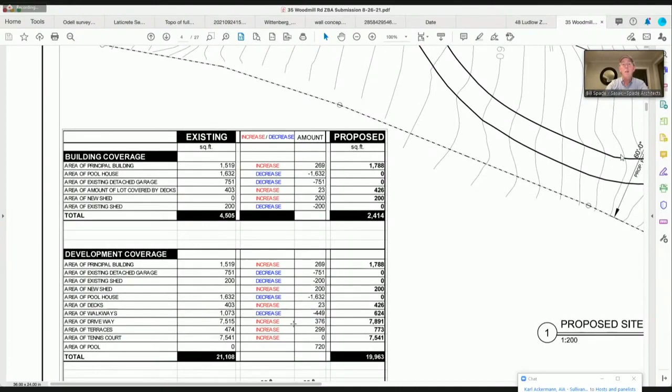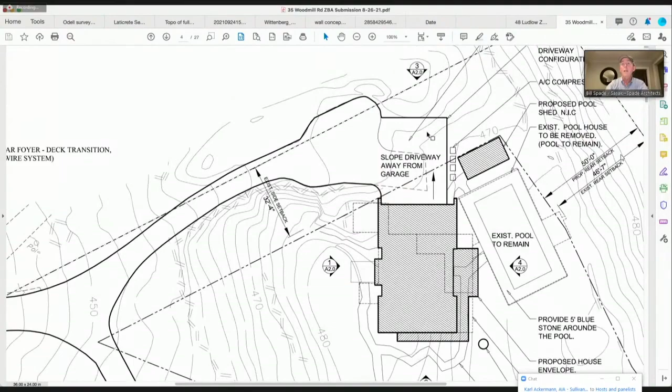They clearly undercounted the driveway, so the driveway on this plan—I'll slide back up here—even with this piece that's off the property, I still couldn't get it to match: 7,500 square feet and then 7,800 square feet. They show an increase in the driveway, and I think, I'm not sure why, because this piece of the driveway at the top was expanded to get to the new garage setup, but they also reduced the driveway by this amount down here. So the reduction seems to be larger than this increase, and yet they show...

We did increase the driveway a little bit at the garage to make sure we had a proper turn-in into the garage, I guess. I'm sorry, I'm missing a piece here. There was an existing detached garage here that this driveway went to. Correct, so we removed that. This loop around here is an add-on. We removed that separate garage and brought it under the house on the left side.

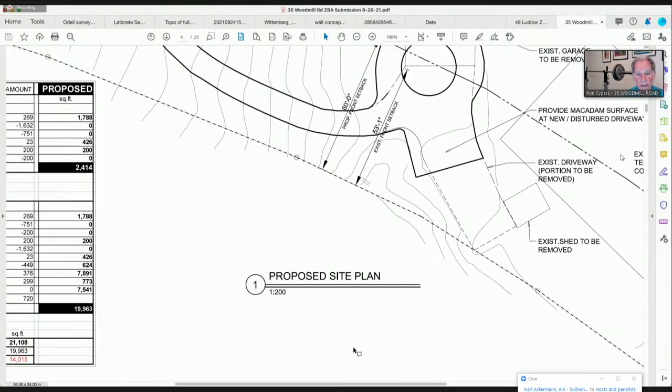I spent quite a bit of time trying to find the derivation of all these numbers, and I couldn't come up with it. I just think that the architect who did it at the time somehow didn't do it accurately, but that was what the zoning variance was based on. And we do now have a surveyor's as-built, accurate documentation of the coverages.

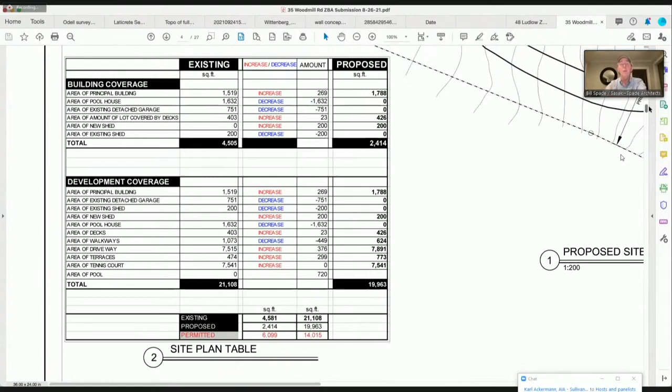Because the hour grows late, I am going to suggest that the board more carefully examine the application and that the applicant leave here this evening with the task of attempting to mitigate this 500 square foot development overage in one of the two driveways or someplace else on the property.

If there's a member of the board who feels differently, please speak up. We do have other cases we have to hear this evening, and I don't feel that we can get where the applicant would like us to get to tonight. I agree, we should postpone until next meeting and give everybody a chance to re-examine the case. The architect and applicant should put their heads together and look for whatever reasonable method they could find to reduce whatever coverage they could reduce.

Not necessarily getting us back to compliance, but getting us to a point where everybody would be a little more comfortable with it. Okay, I think that's a good idea, actually, because there doesn't seem to be any rush to approve this. It's not like new construction is going to be done, so I think it'd be better to take a closer look.

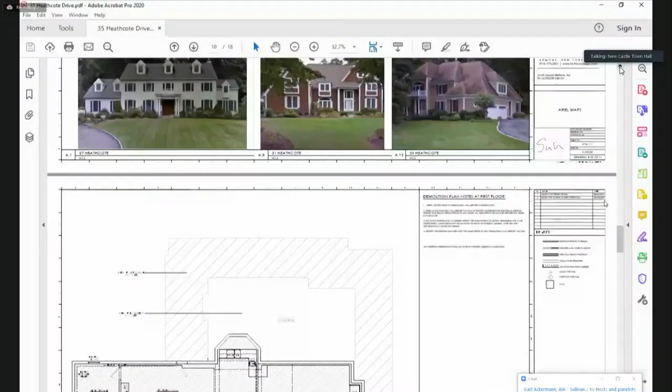If you want to pause for a second just to show us the streetscape, as you might be familiar with Heathcote, it does back to Cowden. We are, as I said, 1 acre, so it's a rather regular configuration of all the houses.

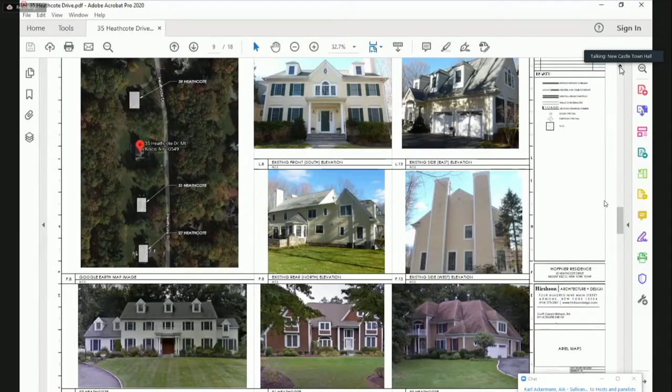Did you have anything more to add, Jeremy? Why is it not possible for the pool to be pulled closer to the house? That's an excellent question. We are at our size, the 20 by 40, that is as close as we could get it while maintaining distance for the kids to be able to navigate around the pool, as well as having the patio that we previously had as well.

I'll jump in a little bit. For the record, it's Neil Alexander, I'm a partner at Cuddy and Feder in White Plains. We should have given this to you sooner, but I went off of Westchester GIS here, and I think this is really a salient piece. It's basically the Westchester GIS of Heathcote and Cowden, and what it shows in yellow is our property, and this informed a lot of our decision making. So the property to the north and the property to the south are protected by the side yard setbacks, but what really gets salient here is the lack of detriment to the property to the rear, because you have actually part of the Cowden open space, and then you can see back another house. So I went also onto Westchester GIS today and prepared, just using their distance tool.

So it's about 438.2 feet to the corner of their pool patio, to our property line. Essentially, as we were doing the layout and trying to make things work, we realized there was no detriment or effect to any of our neighbors. As we worked with the design—I don't know if Jeremy Renato is on the participant list, he can get into this better as our site civil—we had the existing septic system.

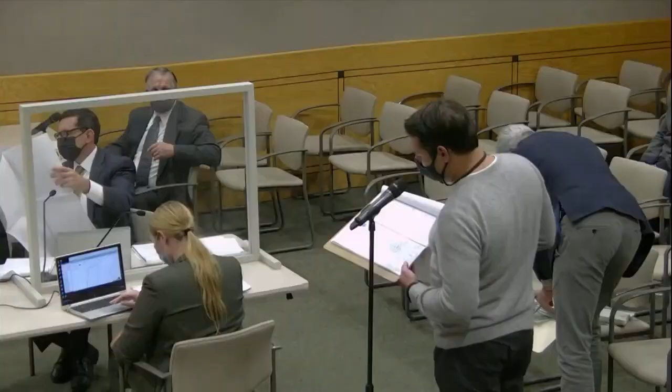What is the depth of the apron on the Heathcote side of the pool? Or I guess you're calling it patio, but that surrounds the pool? It's probably about, I would estimate it to be 36 inches at the greatest. It's wide enough for one person to walk safely around the pool.

You're talking about this area? One other aspect, this is 20 feet on the side.

One other aspect we also did was we made a FOIL request for recent, for the past 5 or 6 years, of your setback variances for pools. As we were trying to right-size it, we saw there was one for 33 feet, there was a bunch in the 20s and one at 14. So we tried to make it inside that range and not make a greater ask than you've given to others in recent memory.

As I think Scott started with, the client really did a lot of due diligence, and we tried to make this a very reasonable ask while understanding that obviously a pool is a luxury in of itself too.

I just want to address that comment. You said you looked back at our prior variances. Yes. Every case that we hear is individual and unique. So I'm not saying you're not going to get this tonight, but I wouldn't use prior variances as a way to think you're going to get a variance.

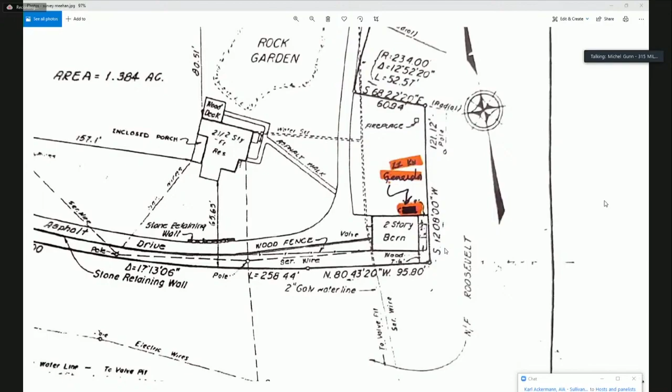If it was sitting there today, nobody would notice it. It would look like a little steamer trunk tucked out of the way. And I don't believe a neighbor or a board member would be offended by it at all.

I'm sorry, I only heard bits and pieces of that. I think at one point one of you made the suggestion that the generator could be shifted to the left, to the corner of the barn. Is that correct? Yes.

And she has 121 feet of property on that side. Okay, so let's assume for the time being that you've shifted it, and that's what your application is requesting. Yes, I thought we amended the application, putting it on the side, but I'm not sure exactly what took place in the last couple of months.

Also, do you guys want to... can we print up a picture of the barn? We have the front side visual from all points.

If you move the generator to the northwest corner of the barn, how far off the property line would you be? I think 110 feet. That can't be true, because that's telling me the barn's 110 feet long.

How wide is the barn? It's the rear line you're worrying about, not the front yard. There are four sides to the barn. The back of the barn, I don't know if it's east or west, only has about 8 feet.

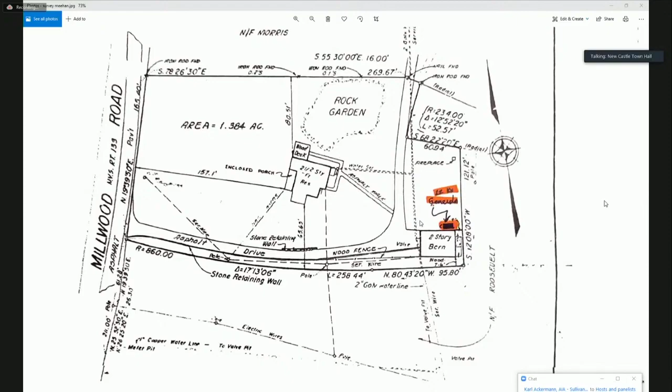Sir, I suggest you redo this and come back, and we will process you next month. Yes, I think we should come back next month, have the applicant prepare a better drawing and come in with a better explanation as to what they're doing.

We're happy to do that, but if you look at the photographs we have and what I have on the screen here, I'm not sure what you show, but it shows on the best location where she has 121 feet, and it's in the middle of the barn in between two windows.

But we don't have the exact dimensions. We want to get the exact dimensions. We have to put it in the application and the approval if we grant it. So you need to come back and give us better information.

Okay, well, what do you guys think if we put it towards the front? Because that's what I'll work on in terms of dimensions. Well, it's not the front, it's the side. On the side of the barn looks like the right place. Just put it there - perfect place, further away from the rear property line.

That's it, yes. Okay, the front of the barn - are we submitting to the building department, or coming back to you guys with zoning? You're coming back to the building department, please. Okay, we'll do this weekend to give you all the information that you need. Thank you so much for your time.